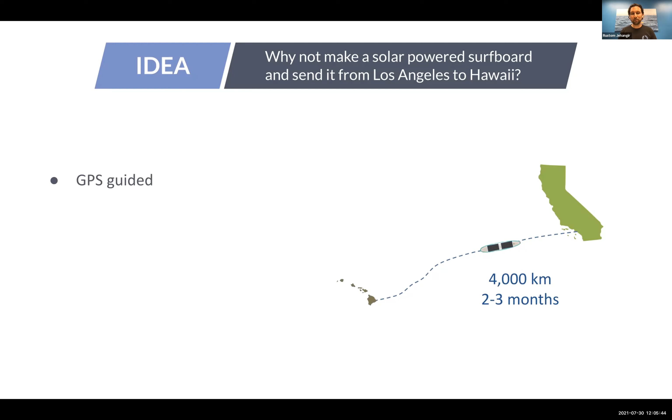We started building this thing in our living room. We wanted it to be GPS guided, with a computer microcontroller on board to guide it, a satellite radio, solar panels to power it, a compass to guide it, temperature measurements so we were measuring something useful along the way, and 2 thrusters to propel and steer the surfboard forward.

So we started working on this. We found all these pieces - it's easy to find a GPS, easy to find an Arduino microcontroller to guide something like this. We even found a satellite radio called a RockBlock, just a few hundred dollars, that we could talk to from anywhere in the world. We bought some solar panels on eBay, had a compass in that Arduino microcontroller, and it was easy to find a temperature sensor. But then we got to the 2 thrusters, and that's where we really struggled.

There were very few options. We scoured the internet and basically found military industrial class thrusters for ROVs and other underwater applications that were like $1,000 to $3,000 each, way out of our living room budget. And then at the opposite end of the spectrum, we found MATE ROV teams, high schoolers, and college students building their own thrusters out of old bilge pump motors from boats, making hacky solutions that worked for them. But there was nothing in the middle, nothing that would work to enable this project and help us send a surfboard to Hawaii.

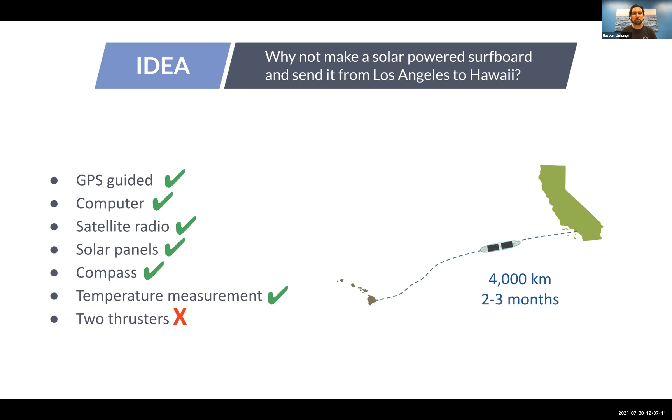We found so many people who were looking for the same thing on online forums and all over the place that we decided to pursue that instead, which started Blue Robotics.

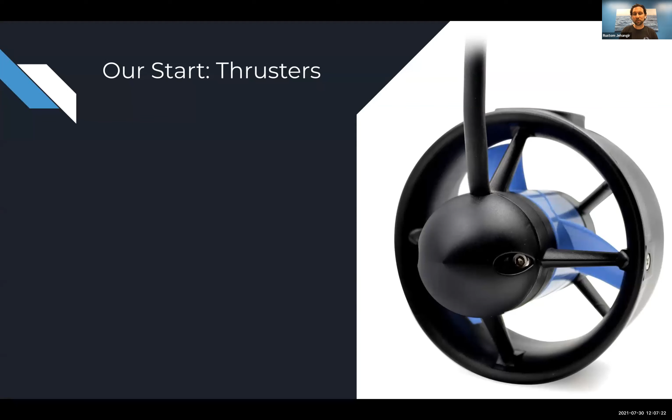This is our first product that we started with in 2014, and it's a thruster. It's a very simple, basic building block for marine robotics. The one we came up with, we put a lot of work into, came up with a clever, patentable design. Our thruster is small, efficient, multi-purpose, well documented, and 10 times cheaper than anything else that was out there.

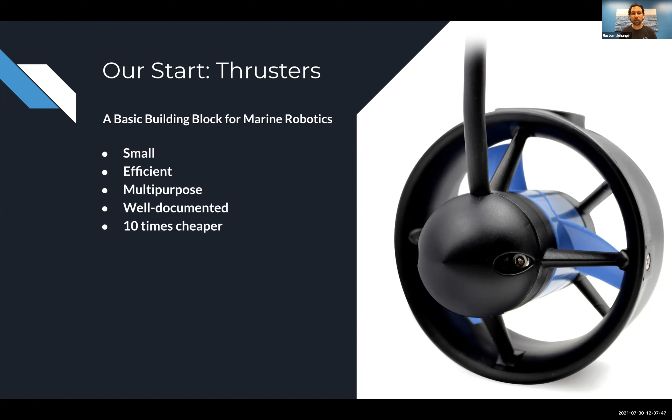At the time, we started selling them for $100 each through a Kickstarter campaign in 2014, and kind of proved out the fact that there was interest in this. We launched this campaign on Kickstarter, raised $103,000, sold over 600 thrusters, and became a marine robotics company. And 7 years later, we're still here.

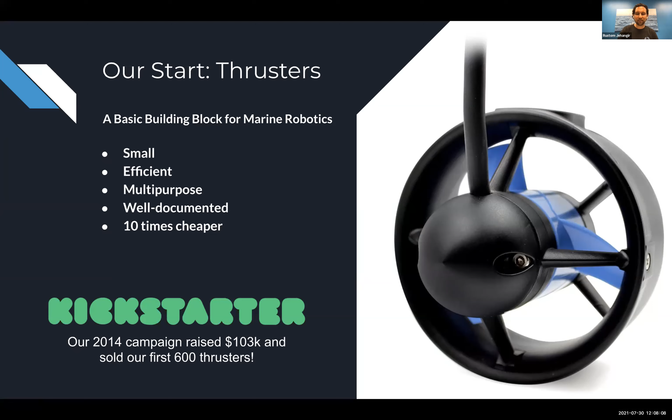I get asked a lot whether we finished this project. We built the Solar Surfer and tested it a bunch, putting about 50 miles on it in the open ocean. Every time, we ended up getting caught on kelp. We had this big keel with lead in the weight at the bottom, the idea being that if it flipped upside down, the weight would eventually flip it back over. But that was also a great way to get snagged on kelp. And so we never made it.

We started selling a bunch of thrusters and had to figure out how to provide those to our paying customers. So we put this on the shelf. It's still sitting here, and we moved on.

Okay, so first I want to talk about the importance of marine robotics components to growth and innovation, from the perspective that I came from in 2014, in which I'd been working in the drone industry for 3 or 4 years and watched that industry explode.

So in 2010, I was in the aerial drone industry. I had just gotten out of college, and it was an exciting place to be. There were tons of potential applications and benefits for drones. And it was possible. There were affordable core sensors and processing, things that had come out of the cell phone world like IMUs and microcontrollers, hobbyist electronics making that easier.

There's open source hardware. A number of companies came out with open source autopilots for these drones, open source software driven by that same community that made it much easier for somebody like me to get started, and I think thousands of other people to get started.

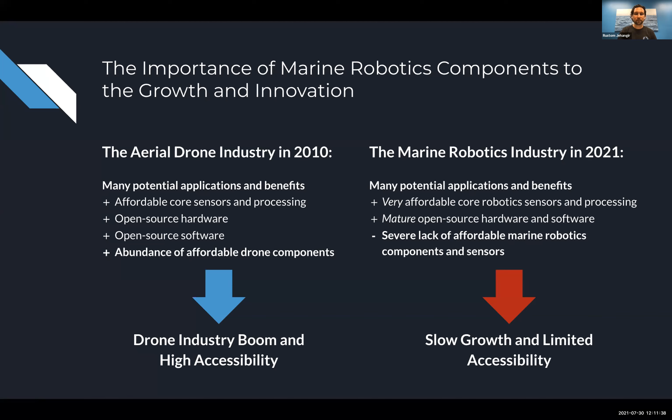So it leads to slow growth, leads to limited accessibility, and that's what we at Blue Robotics are trying to change. I want to show you a little bit about what we've become over the last 7 years in trying to accomplish that mission. I'm going to focus on some elements of our business that I think have become unique to us, things that are also very important to our customers and that we really care about.

First of all, we realized that after thrusters, people need more things. Next they need enclosures, then they need sensors, then they need cables. So we've produced a wide range of modular, flexible, and enabling components. That started with the thruster.

We added electronics to communicate with an ROV. We added a series of watertight enclosures. This is an underwater cable penetrator to make it less expensive to pass a cable into an enclosure. Pressure sensors, temperature sensors, and this is an echo sounder sonar.

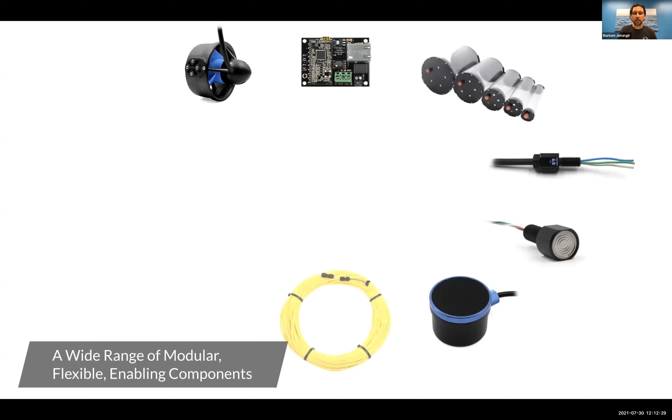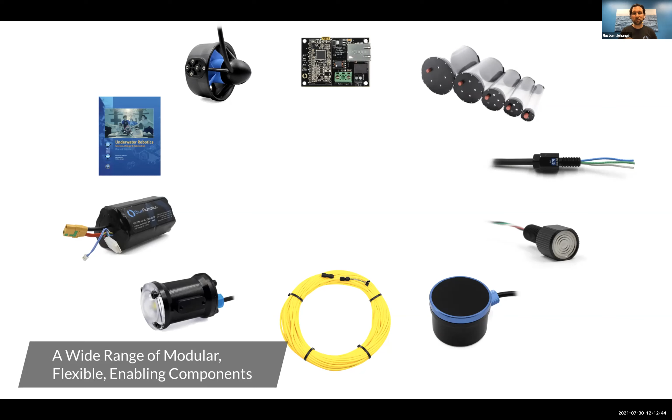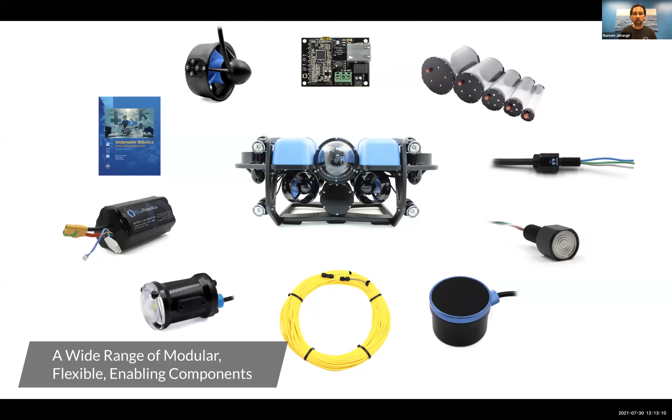Called the Blue ROV2. It's a remotely operated underwater vehicle, and it basically uses all of those components that we had built up over time. There's 8 thrusters on here, 2 different sizes of enclosures, lights, electronics, the tether cable - all of those individual pieces, but they can all be used individually for other applications as well.

I want to show you our newest product right now, mostly because we're really excited about it, and I think it fits into this model pretty well. It's called the Wetlink Penetrator, and this passes a cable, like you can see on the right, into an enclosure. It's got a little O-ring here to seal against the enclosure.

With this device, we have no potting compound. It's easy to assemble, just takes a few minutes. It has a 950 meter depth rating, and very, very low cost - about $12 each for one of these units, compared to, I think last time I checked, what a SubConn connector set costs, about $150. So 10 times cheaper to pass a cable into an enclosure.

We've launched one size of this so far this summer, but we're making a full product range for 4 to 9 millimeter cables to enable lots of different applications in marine robotics.

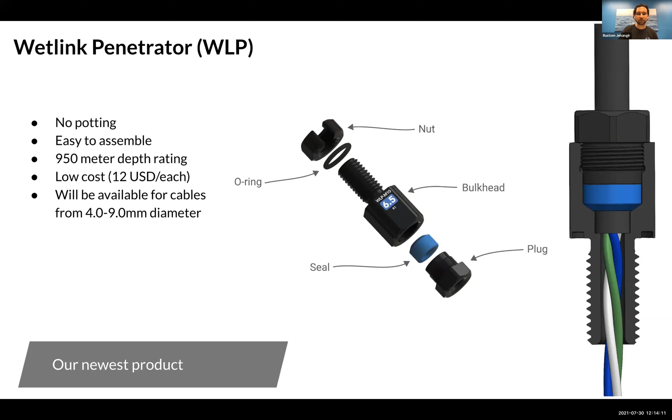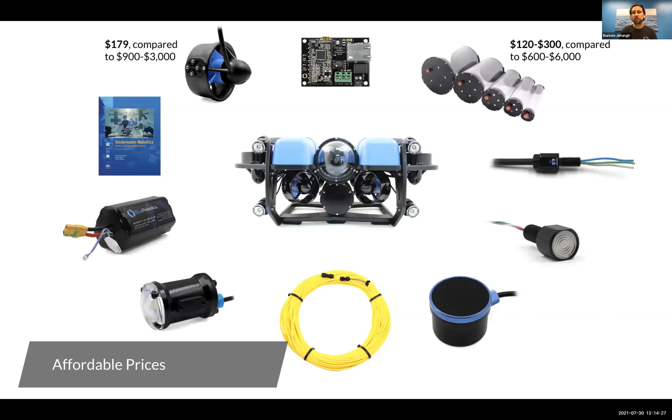All of these products here, we shoot for very, very affordable prices. So the thruster right now is about $179 compared to the original $900 to $3,000 price that we found for thrusters. Our enclosures can be configured, but are usually between $120 and $300 compared to what else I can find, which is $600 to $6,000 for similar sizes.

This Wetlink Penetrator is $12 compared to the price of an underwater connector set. This echo sounder is about $300 compared to our market survey, which found options between $600 to $8,000 for similarly performing products. The light's $129 compared to $600 to $3,000. So you can see all of these price points are wildly different than what was previously out there, including on the ROV, which starts as low as around $4,000 and can be configured up to $7,000.

And if you're familiar with the ROV market, it's very easy to get an ROV this size and capability to cost way more than your car. So this enables a lot of people to get involved.

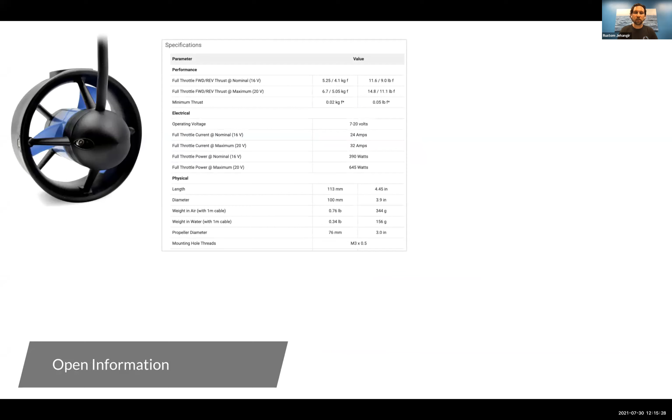One of the most important things to us, and has been important since the beginning, is sharing information about our products as clearly as possible, having open information. So this is an example on our thruster - we have very clear specifications, performance charts, and 3D models you can download to integrate into your application, plus dimensional drawings.

This is something we really couldn't find on existing products at the time. It's just another barrier to people using our products. If you have to sign an NDA to get a CAD model or talk to a salesperson to even find out the price, it just slows everything down.

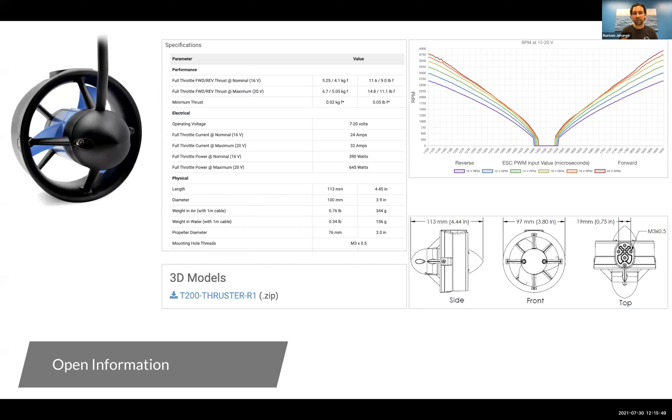We also leverage a lot of open source software, a lot of it coming from the drone world. One example is ArduSub, which is based on the ArduPilot project, one of the most mature open source autopilots for drones. We use a branch of that software that we maintain to control ROVs, and it's worked out really well, giving us access to hundreds of other developers working on this code around the world to make it better, contributing to the underwater version of that.

Similarly, on the top side, we use a software called QGroundControl. It's originally ground control software for drones, but works great for ROVs too, and gives us a lot of capabilities right out of the box.

There's lots more. For all of our sensor products, we've got libraries, we've got code examples. We try to make all of that as accessible as possible. We don't sell any software at all, we just sell hardware.

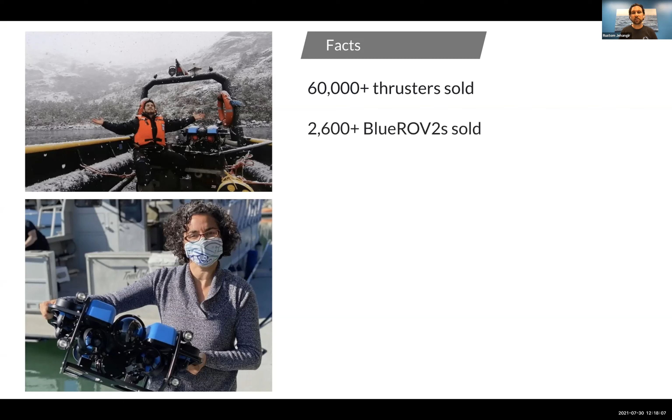So some facts from that. Seven years ago, we sold 600 thrusters in our Kickstarter campaign. We've now sold more than 60,000 thrusters. We've sold over 2,600 of those BlueROV2 vehicles. And we have 220 products in our store, and all of them have been fairly popular. 70% of our orders ship outside of the USA, which I think is always an interesting fact.

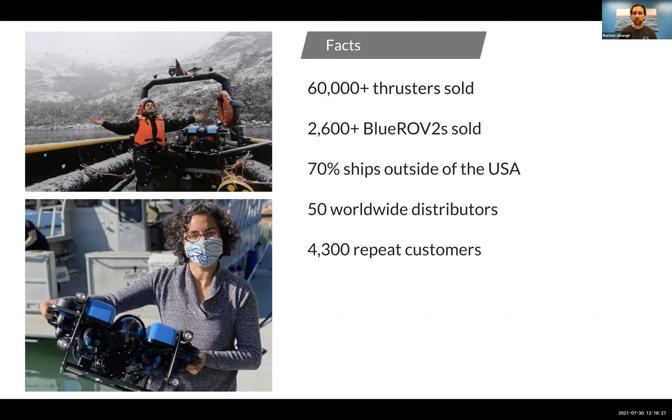We've got 50 worldwide distributors. We have 4,300 repeat customers to our online store. And I guess the point with all these numbers is just that there's a lot of interest and a lot of growing momentum in low-cost marine robotics. It's a lot of opportunity here.

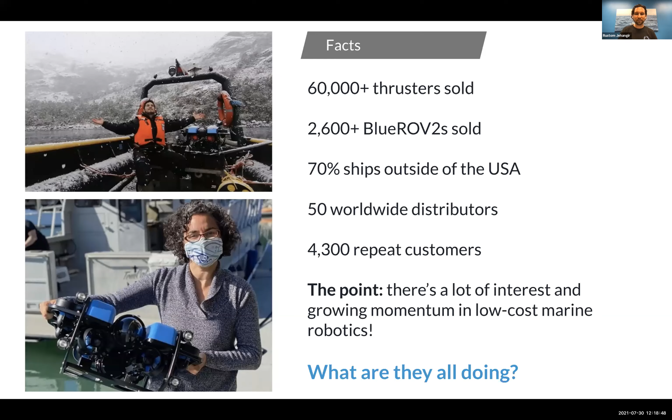So next, that's a little bit about us. I want to talk about what all those people are doing with this stuff, you might be wondering. There's lots of applications. We sell lots of stuff to businesses, aquaculture, inspection, university, students, research, all over the place. But today I'm going to talk about some stories in the restoration and conservation area, because I think those are particularly cool.

So I'm going to start off with ocean and waterway cleanup. Something you see in the news all the time. We obviously all understand the importance of that.

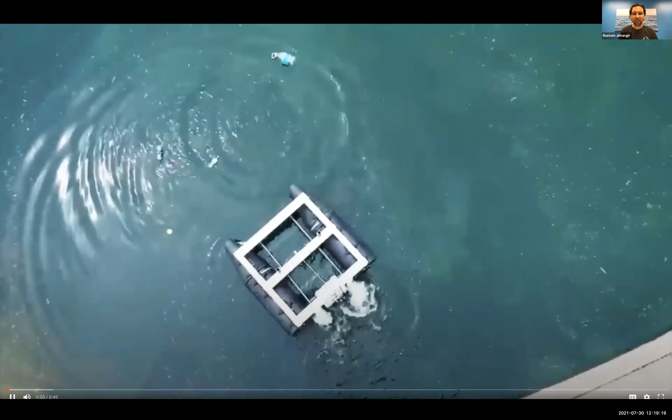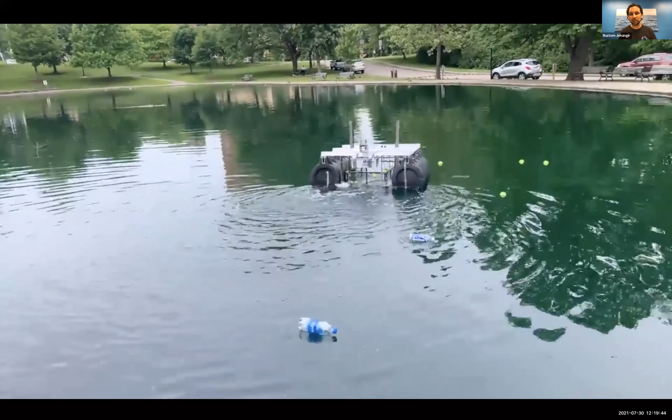This is a video here from a customer. This is a young company, young startup, a couple of people just out of school who are trying to create a vehicle, much like our Solar Surfer, but this one's intended to clean up the oceans. So it collects trash, brings that to somewhere where it can be dumped. Very cool application. This is using a couple of our components - our thrusters, some of our navigation, open source software - and it enables them to do something like this pretty quickly, make a prototype quickly.

This one's cool actually, because we met another company a few years ago who's doing something very similar. They're in the Netherlands and called RanMarine. They've been working on this for about 5 years. They've got this vehicle called the WasteShark that is intended to do a very similar thing. They're also using those same thrusters to propel it, and you can check out what that looks like here.

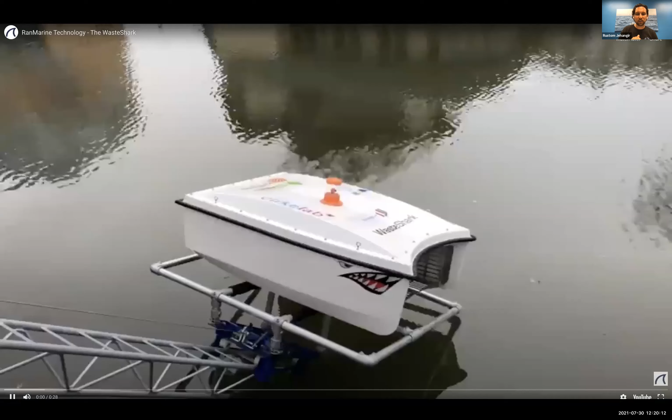If you think about the scale of cleaning up the oceans and every lake, pond, waterway that has trash in it, it seems obvious that you need low-cost robotics to do that. You can't do this with $100,000 vehicles. You have to do this with very low-cost, affordable vehicles. And the way to get there is by having low-cost components and technology.

There it is, full of trash, ready to be cleared out.

Next up, we've got a cool story from one of our customers in Canada who's doing ghost gear cleanup. If you're not familiar with ghost gear, it's left behind fishing gear like fishing nets, crab pots, lobster traps, and there's just huge amounts of this out in the ocean. I'm gonna let them explain here. This is a pretty cool video, about 2 minutes long, but I think it's worth watching.

We put the ROV down, and as it went down the anchor line, it discovered drag marks in the sand, and then looming out of the darkness came these images, almost looked like the Titanic, of the stanchions sitting about 1.5 meters off the bottom of the ocean. Shipwreck diver Tony Sampson and his crewmates didn't find the Titanic wreckage. They didn't find buried treasure either, but they did find someone's trash, abandoned or lost fishing equipment known as ghost gear, spread over a 600-meter watery grave.

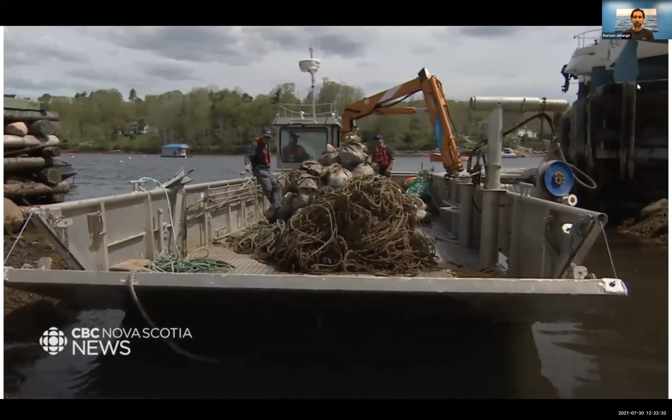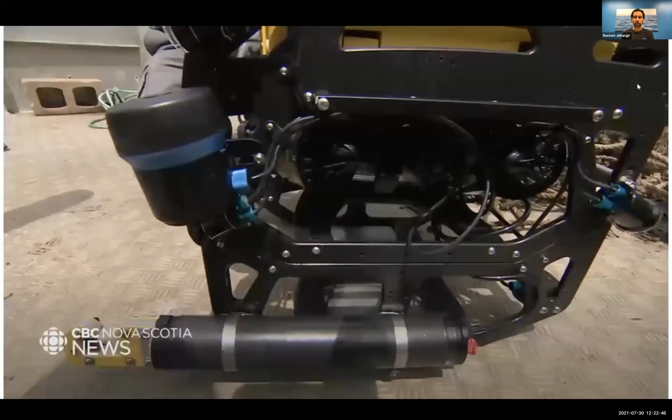The Canadian Hydrographic Service, which spent 7 years mapping this area, provided detailed images to the crew. Keep it coming, buddy. And they had an ROV customized with extra bells and whistles just for this quest. Ghost gear recovery - if the lines get caught underwater, I can remotely cut the lines.

Fishing gear entanglements are a major cause of death for endangered North Atlantic right whales. In response, the federal government set aside $8.3 million over 2 years to fund ghost gear retrieval and innovation projects. But so many proposals from companies came in that all of the money was handed out in the first year. The Titan team didn't have federal funding, but they went ahead with the cleanup anyway. This here, to pull this off the bottom, it not only gives us a warm sense, but it's doing something for the environment here.

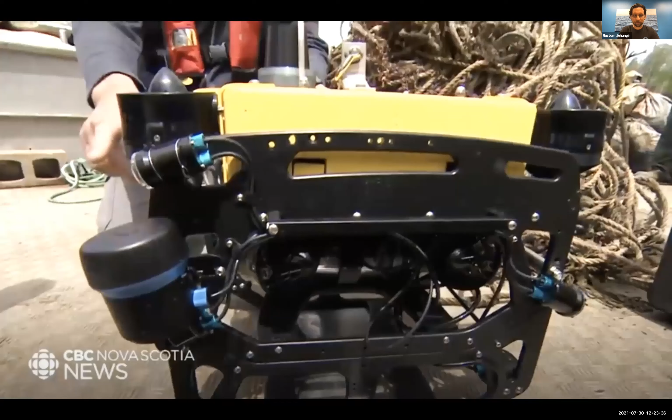I think that shows a little piece of what can be enabled by robotics here. And I also think this one is a particularly good example of this vehicle taking advantage of the flexibility and modularity that our products have. The thrusters are moved to a different location, it has added sensors, and it's got added electronics down the bottom. They've taken full advantage of flexibility to make this vehicle suitable for their application.

That guy mentioned that he's got a cutter on there to cut ropes. I think they actually built that themselves to handle that application, which is very cool and highlights how enabling tools, low-cost tools like this, can open up new applications. This ghost gear fishing problem is a big enough deal that, like I said in the video, there is federal money available as part of Canadian-American collaborative fishing agreements. I hope that continues to grow.

Next up, I want to show some projects on invasive species mitigation. These are particularly cool, interesting applications of robotics. This is Matthew Dunbabin from the Queensland University of Technology in Australia, and the vehicle he's next to here is called the COTSbot. This is from a few years ago - their first prototype of a vehicle to address the problem of invasive crown of thorns starfish in the Great Barrier Reef.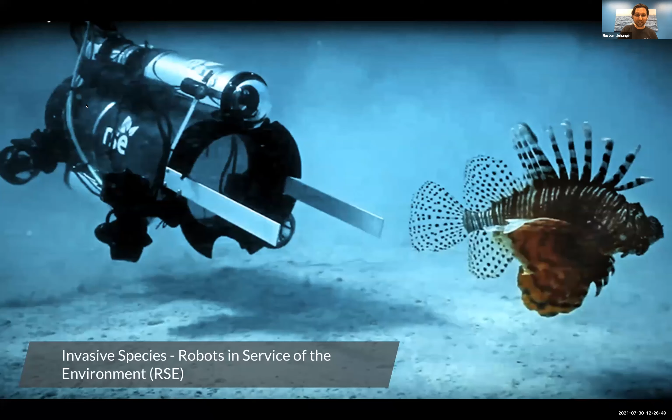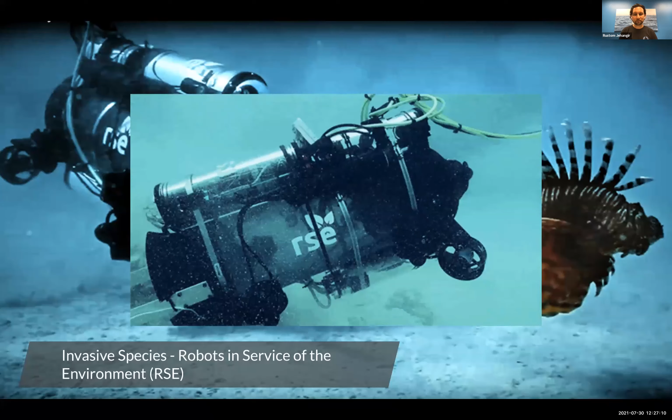This actually has electric plates that stun the lionfish and then suck it into this custom-built lionfish vacuum in the center. Got a quick GIF of that happening. Pretty wild. You can imagine that happening at a larger scale and helping to address that problem, again enabled by lower cost components.

And the last section here, I'm going to talk about a few research projects. I could talk about these all day and find lots of examples, but I'm just going to show two here.

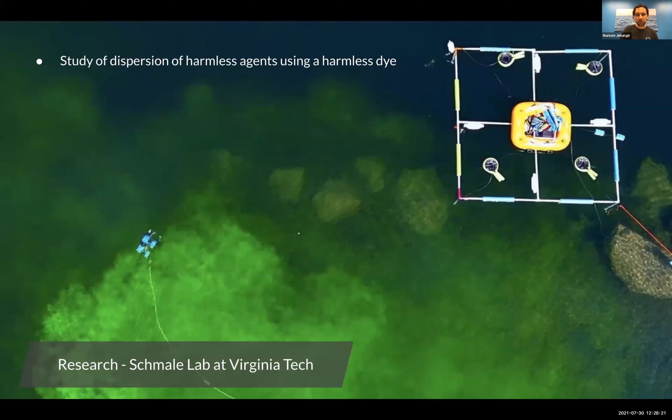This first one is at the Schmale Lab at Virginia Tech, which is studying how harmful agents disperse in the water. In this case, they're using a harmless dye in the water, and they've got a Blue ROV2 equipped with a fluorometer that can measure the concentrations of that dye in situ as it's dispersing. They've also got a drone above that took this photo and is able to record data as well. I think this is a cool application - it helps a lab like this have another tool in their tool belt when running these science experiments that may not have been previously available.

One of my personal favorites here: this is from Applied Research Associates, I believe in Colorado, and they've been doing work studying how burning oil spills disperse. They use this ROV to measure the thickness of an oil spill from underneath with sonar technology as that oil spill is burning. They did these trials over and over and over again. It's one of the crazier ROV applications that I've seen.

The technology here, the low-cost technology, is enabling new experiments, enabling us to study new things. I'm just showing you a little snapshot here, but there are hundreds or thousands of people finding unique ways to use this technology, and we want to enable that.

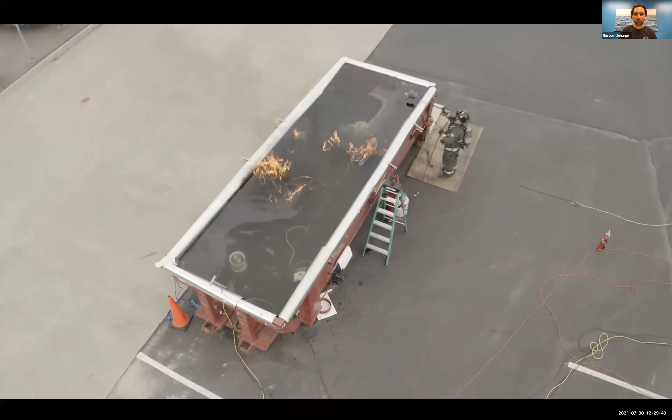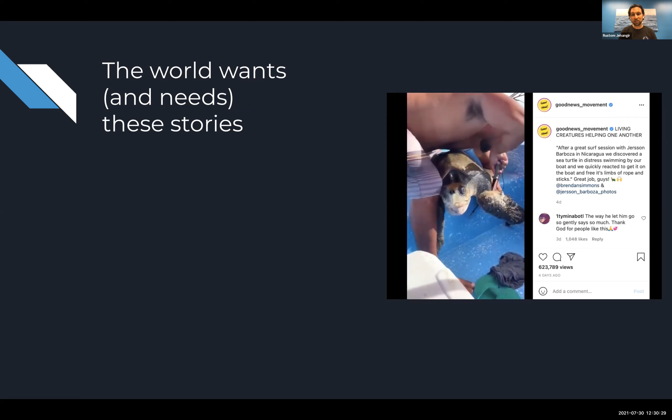The point here is that these are the kind of stories people are seeing every day. This is the information that people who are growing up and interested in the ocean are seeing every day. So they're developing a desire to take care of our planet, and it's at the forefront of their priorities - something they care about. This video has 600,000 views, so obviously people are very interested in this and in solving this problem. I think that's only going to continue.

So as people want to continue solving these problems, they are going to need low-cost technology. It's going to be one of the tools that helps us get there.

I encourage you all to think about how in your own work you can take advantage of low-cost technology, what solutions that could open up for you in your future work, and how you can contribute to helping make that available for everybody here and for the next generation who's working with these problems. So that's the main part of my talk.

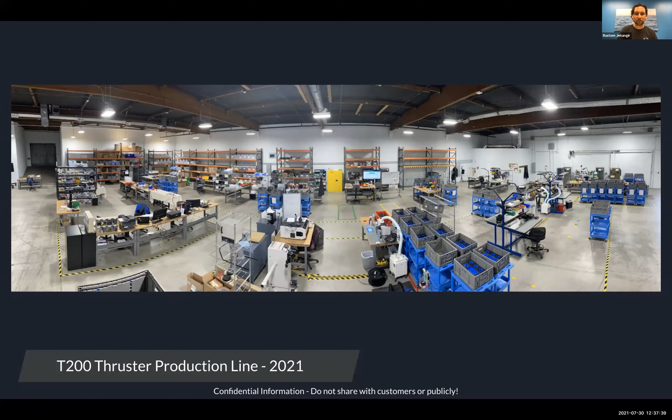All right, next one is, what are ways that companies can work together to help make the ocean more accessible? This is a challenging question as well. But my first answer is to, again, share.

Same bullet points here. We need to inspire and educate. Companies can work together to do that. You can share what another company is doing. Just share cool news that's in this industry and further reduce knowledge barriers, get more people familiar with it, more people excited about it.

And then next we can collaborate. Of course, lots of ways we can do that. I think one of the things that we've learned is that sometimes the benefits of collaboration may not be directly financial benefits. So you're not necessarily going to make a cut of the product you work on with somebody else that you collaborate on, but there's a lot of other benefits of working together. There's the knowledge you gain, the mutual knowledge you gain. There's shared marketing value, reaching out to new people, new industries, crossing interdisciplinary lines. So I think it's always worth trying to collaborate regardless of the financial situation.

You also need to think broadly. There's a lot of very specific solutions in marine robotics, but I think often what you're working on in one space might be really useful for someone else in their project. And again, you have to be sharing here. You've got to put your projects on Instagram or on an online forum so that other people can see what you're doing to find that out. But that's often the case.

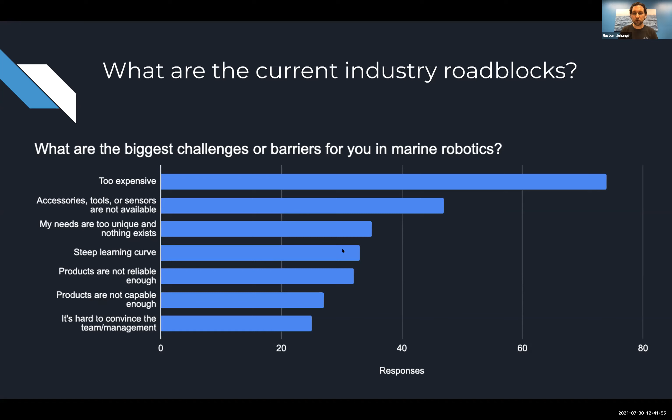So I think this is interesting and points out that there's still a lot of room and a lot of interest in low-cost marine robotics and in this space growing. And I believe that is actually it.

At this point, I want to see if there are any other questions from anyone in the audience.

We had one come in, and that was: are you building all components for the thruster yourself? Is the motor something that you produce? Yeah, good question. So we do produce everything, but we use a lot of outside vendors to produce raw materials.

So the thruster is made of injection molded parts. We don't do any injection molding here. We have somebody else do that, and they send us parts. The motor we designed, but we have the motor wound. We have the magnet rotor manufactured elsewhere and brought here, and we do the final assembly.

And we found that that's the best combination of ways to do things that allows us to move pretty quickly and keep the costs low, because we can get parts from low-cost suppliers who are really good at injection molding or motor winding. We don't have to become competent at those ourselves. And then we still maintain a lot of control over the final product and the quality of that product.

Every one of them goes through our hands. Everyone is tested, everyone is assembled here. And that allows us to be agile. If we find a problem, we can fix it quickly, and it allows us to expand our product line quickly as well.

Good question. Is there anything else? Yeah, the next question is: can you talk about some of the new products you're working on? Yeah, I can definitely do that.